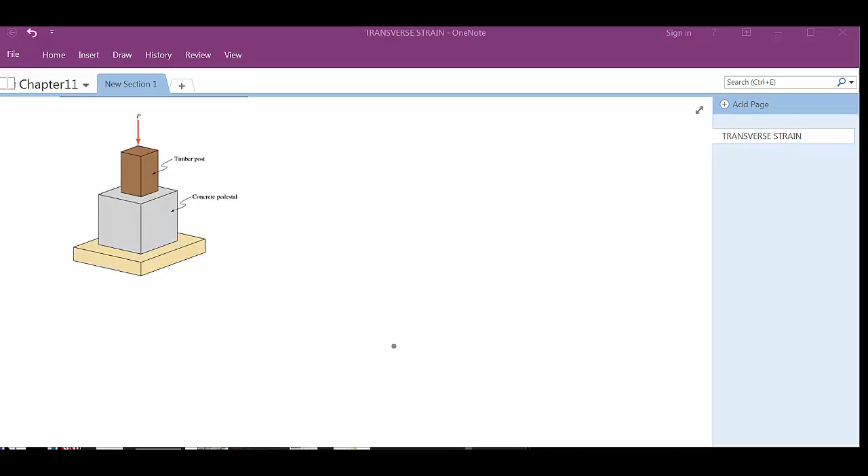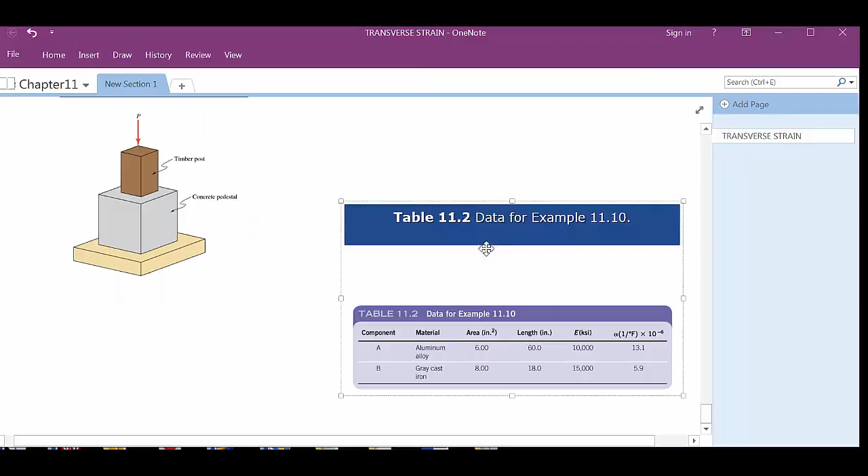So there again, table 11.2 shows you the different information there, and I don't know if I captured that here or not. Looks like I might have. That's it right there, isn't it? So we'll share that. Whoops, I didn't need to do that. Sorry about that. Put that up there, and we'll have that to look at.

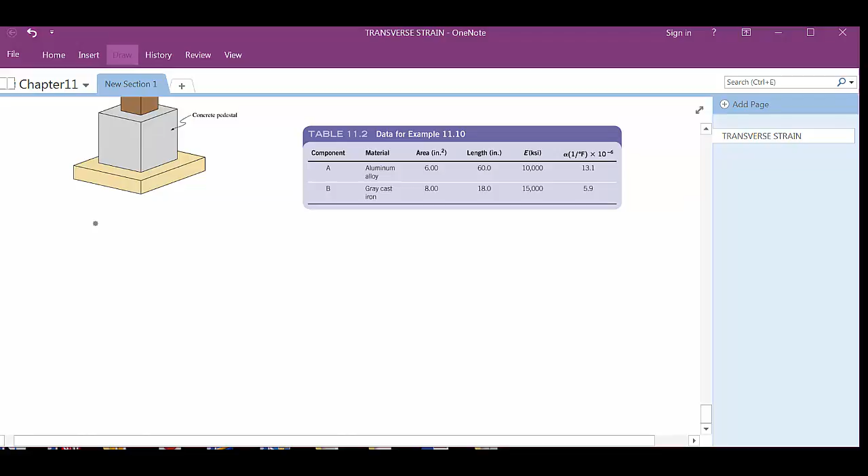So what do they tell us to do? Well, it says consider two steps: unrestrained expansion followed by the application of sufficient force P to restore the member to its original length. So it's a two-step process here. The first step is the unrestrained expansion, we're going to use the equation from page 223, 11.3, where deformation equals the deformation of the aluminum plus the deformation of the cast iron.

Okay, so that's not the actual equation. The equation we're going to use is, they draw it out here, alpha, which is the thermal coefficient of expansion, right, times the length times the change in temperature of each one of those components. That's for the aluminum, plus same thing for the cast iron. And we add those up. So did they give us all the information there? I think they probably have. So this is kind of just plug them in there.

So we're looking at 13.1 times 10 to the negative 6th, 1 per degree Fahrenheit, times the length, which was 60 inches, and the change in temperature. It gave us that, 20 degrees Fahrenheit, plus

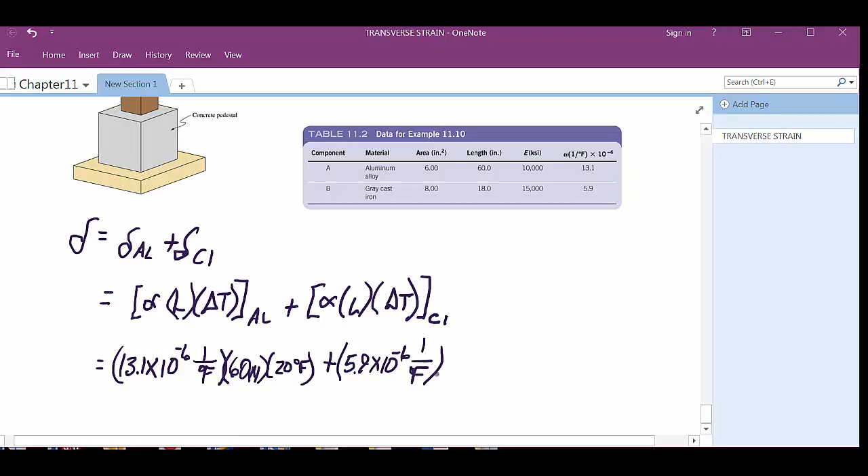the coefficient will be different here. We'll want 5.9 times, I'm assuming, 10 to the negative 6. Yep. And then the length on that one is 18 inches, times 20 degrees Fahrenheit. Now, what I would suggest you do is punch all those numbers in your calculator right now and make sure you get 0.01784 inches.

So with all those conditions, that's how much that's going to move, how much that's going to deform. 0.0178, and the one piece was 60 inches, and the other one was 18. So it's moving about 18 thousandths of an inch. Again, make sure you can punch those in there. If you can't, then you need to figure out why. Because if you have all the numbers correct come test time, you should be in pretty good shape. But if you can't get it replicated here, then you need to know why.

Now, that just tells you how much it's going to move based on those characteristics of the material. Then we've got to figure out what kind of force is going to be applied to do that. So we're kind of working backwards here, aren't we?

So that part of it is equation 9.10 from back in chapter 9, where we used the modulus portion of that to figure out the deformation. So this, if you will, was part A, and this is going to be part B. And there, the deformation equals what? The force times the length over the area times the modulus of elasticity of the aluminum plus, same thing, force times the length over area times the modulus of the cast iron.

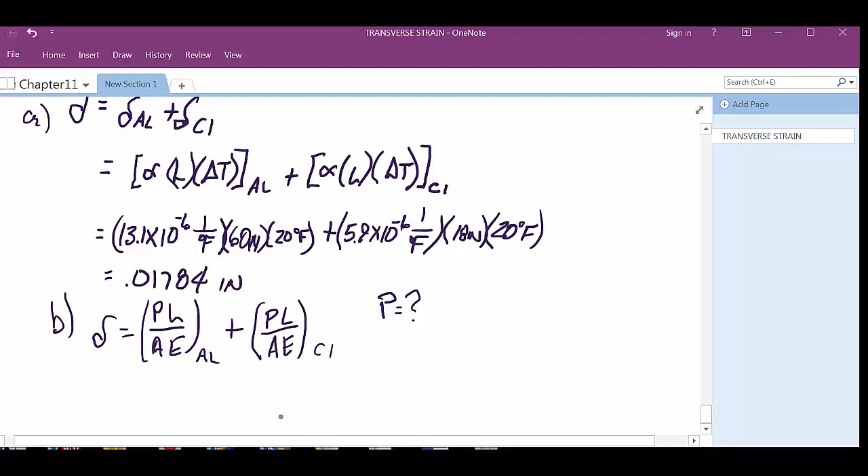Then that has to be rewritten because we're looking for P, aren't we? We're looking for the force. So we have to rewrite that. So look there on that page, that gets rearranged so that we've got the force equals what? The deformation over this big mess, the length divided by the area times the modulus, and this is for the aluminum, plus, same thing, the length over the area times the modulus of the cast iron.

We know the deformation now, right? 0.01784 inches divided by, well, we got the length of, for the first one, we've got a length of 60. The area was given as 6 square inches. And then we were given the modulus of elasticity, 10,000 kips per square inch. Plus 18, 8 square inches, 15,000.

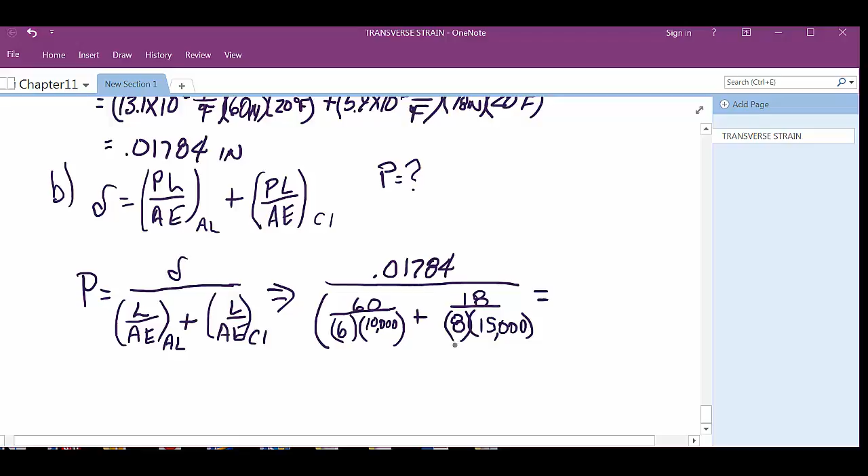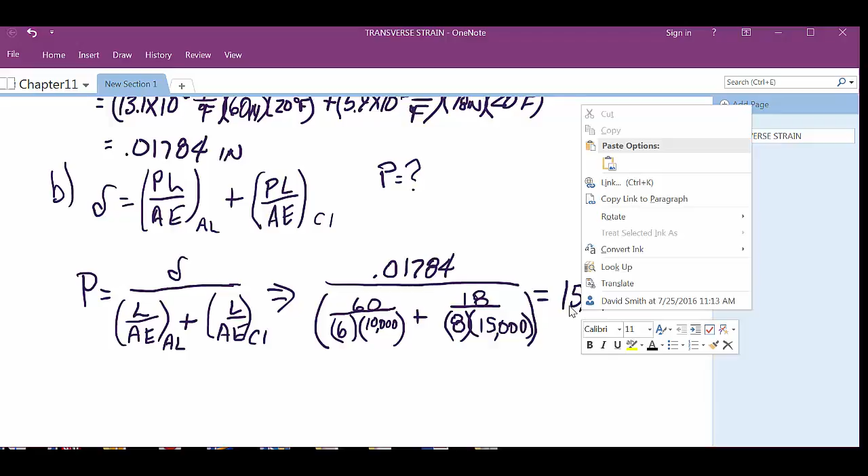So what do we get there? We end up with a P of 15.51 kips. Again, put that in your calculator and make sure you can get that. Or what would that be? That's 15 point, right? It's not a comma.

So then what? It says calculate the stresses then. So that's the force that's being applied to make that change, that 18 thousandths of an inch. So calculate the stresses. So the stress in the aluminum, or like I said, they're using the S, is what? The force over the area. So we got 15.51 kips, and the aluminum we had 6 square inches, right? Yep. So we're looking at 2.59 kips per square inch.

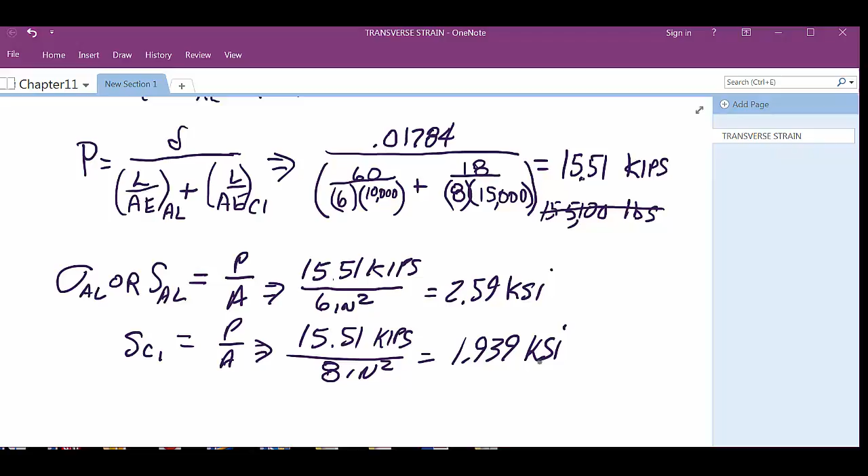Stress in the cast iron, same thing, force over area. Still got 15.51 over 8 square inches, right? 1.939 kips per square inch. So it's a composite deal here. It's got one force acting on it. What kind of stress is it building up in each of those components? And that's the stress that's being created in each of those components. Okay? And that is an unrestrained condition. So anything can move there.

Questions? Shouldn't be too bad. We're getting to a point now where it's just making sure you use the right equation. In some cases they're being rearranged, but you'll have your book come test time, so you should be able to find the right equation without too much difficulty, and then punch the right numbers in and make sure you can punch them in your calculator. If you can't, then you'll be in trouble.

Well, then the next example problem they give is another type of member composed of two different components, but in this case the components are in parallel. An example they cite here is a column composed of a steel shape encased in concrete. So the stress is going to be acting on both of those materials at the same time, right? If the stress is too much on the concrete, then your concrete's going to break out, isn't it? So you got to be careful of that.